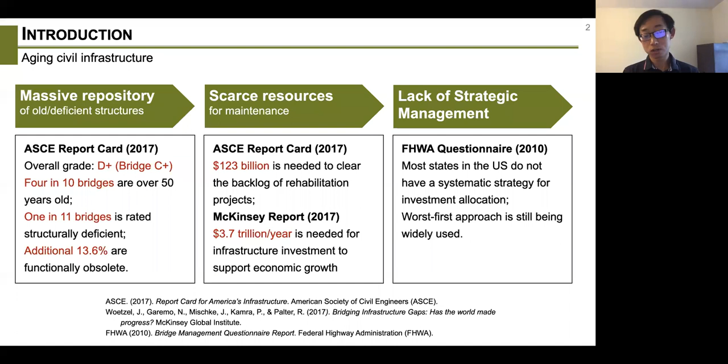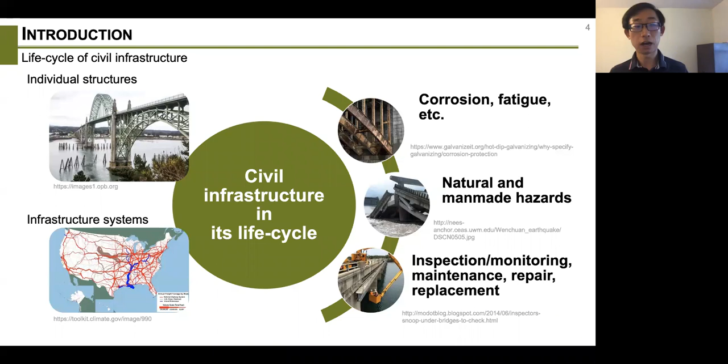So basically, in the service life of the civil infrastructure, the assets may experience gradual performance deterioration due to a number of environmental and mechanical stressors, such as corrosion and fatigue. It may also experience sudden performance drops under natural and human-induced hazards. Because of this, asset managers need to plan inspection and monitoring actions, as well as maintenance and repair actions. All these 3 aspects of infrastructure lifecycle apply to both individual structures as well as large-scale infrastructure systems.

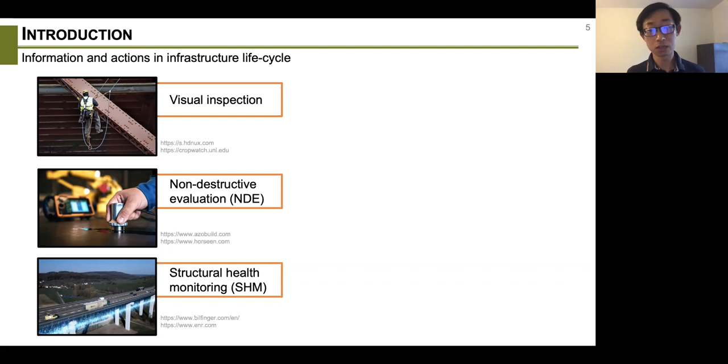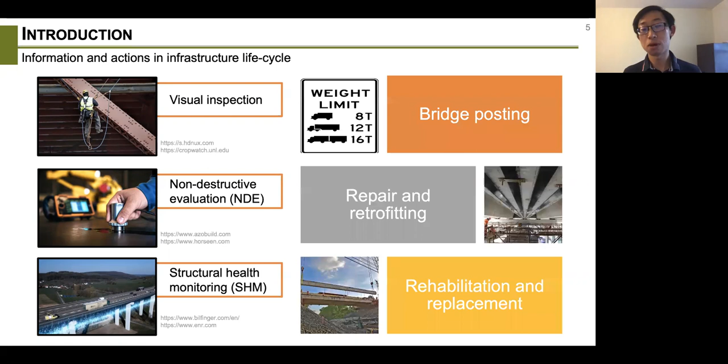In terms of information that can be gathered, for bridges, at least, we have a wide array of actions that can be conducted. This ranges from simple visual inspections based on human bridge inspectors. There are also more advanced technologies based on different types of sensors in the form of non-destructive evaluation, or NDE, or structural health monitoring, or SHM. The latter two have been extensively discussed by Dr. Schumacher previously in this seminar series. Based on the information gathered, the asset managers can decide whether I should post a bridge for weight limits, whether I should repair or even replace a deficient bridge.

So here in this talk, I want to mainly answer three questions. The first one is, how do we quantify the economic value of information gathered from different types of inspection and monitoring actions?

The second question I want to answer is, how do we make decisions based on the value of information? And finally, I want to touch something more general, that is to move from individual structures to interconnected infrastructure systems, and why this is important.

So first, let's look at value of information and its quantification. The quantification of value of information in structural engineering is achieved by using structural reliability analysis and quantitative risk assessment. Structural reliability analysis, for those non-structural engineers, is basically a methodology to quantify the probability of failure given a certain limit state.

And based on the probability of failure, we can combine that with failure consequence to calculate quantitatively the structural failure risk. The benefit of inspection and monitoring information is we can update our prior belief on the structural capacity and structural demand. And in this way, we can update the failure probability of the structure.

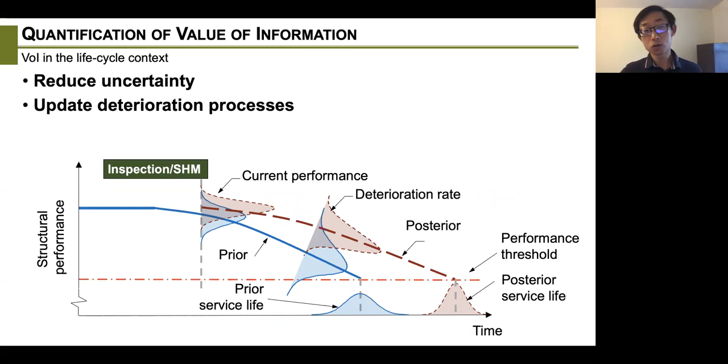In the life cycle context, we can also have a different aspect of understanding value of information. That is, for the inspection and SHM results we gathered from different actions, we can update, of course, the current performance of the structure. But in addition to that, we can also update the entire deterioration process. The benefit of doing that is this information can facilitate decision makers for maintenance decisions.

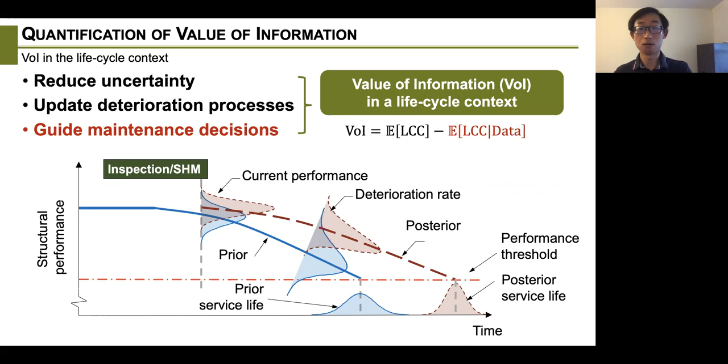And here we can define value of information in the lifecycle context as the difference of total lifecycle cost with or without this information gathered from different types of inspection and monitoring actions. As you can see from the previous slides, a key part of quantifying value of information is to conduct Bayesian updating. And for this task, what we used is called Bayesian networks.

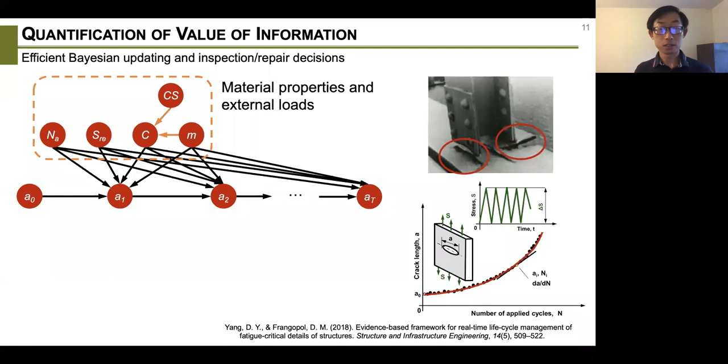So coming back to the applications in structural engineering, the Bayesian network shown on this slide is actually for the modeling of fatigue problems in steel structures. For this type of problem, we have a number of material properties and external loads that will decide the fatigue crack propagation. And based on the fracture mechanics model, we can predict the fatigue crack sizes based on all these primary random variables. Of course, we can use inspection nodes to model different types of inspection results.

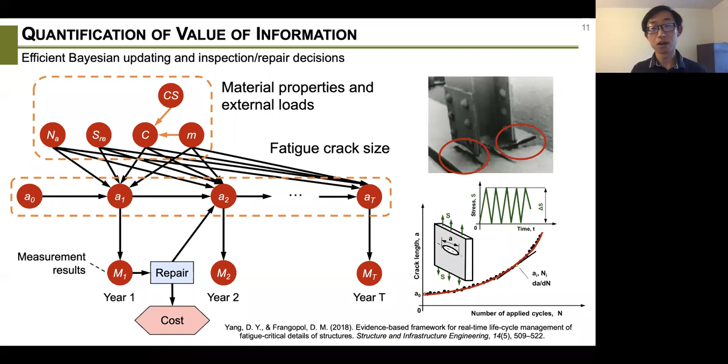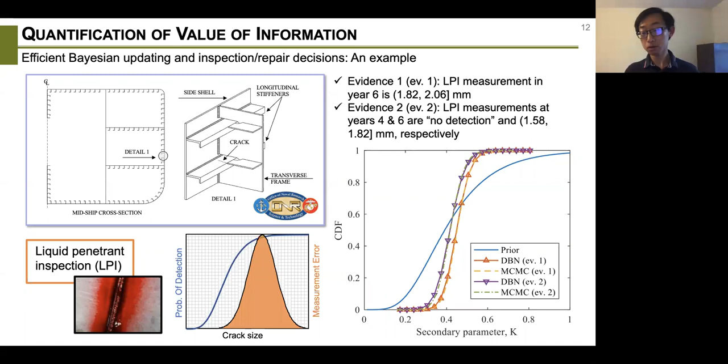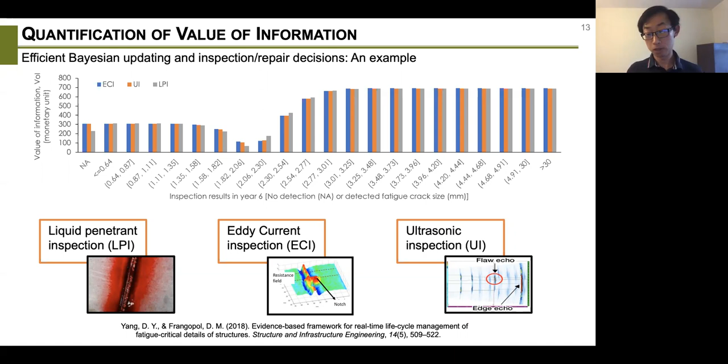The second topic I want to introduce today is optimal decision making. Here I want to introduce two general genres of decision making, that is optimization-based decision making, and more recently what we call decision automation using reinforcement learning. For optimization-based decision-making, basically we have different inspection or monitoring schedules, and we can calculate the value of information or the lifecycle cost given such inspection schedules in the service life. What we want to implement is an optimization algorithm to find the best inspection schedule.

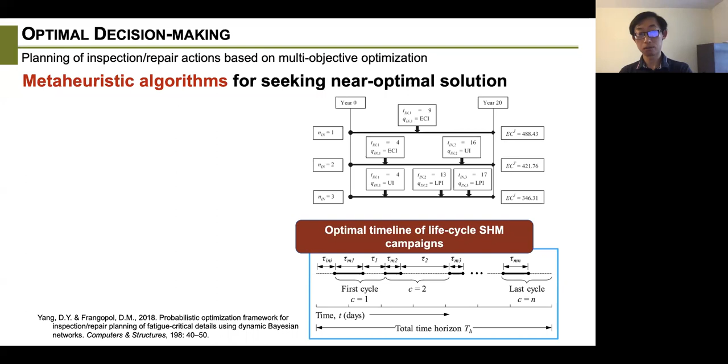This methodology can also be used for structural health monitoring campaigns. For this purpose, we can decide when we need to start our monitoring campaign and for how long we need to have this monitoring system on the structure. Another benefit of using a genetic algorithm or a particle swarm optimization is it is relatively easy to extend from single objective optimization to multi-objective optimization. For example, we can conduct multi-objective optimization to have a set of optimal compromises between conflicting objectives such as value of information and lifecycle maintenance cost.

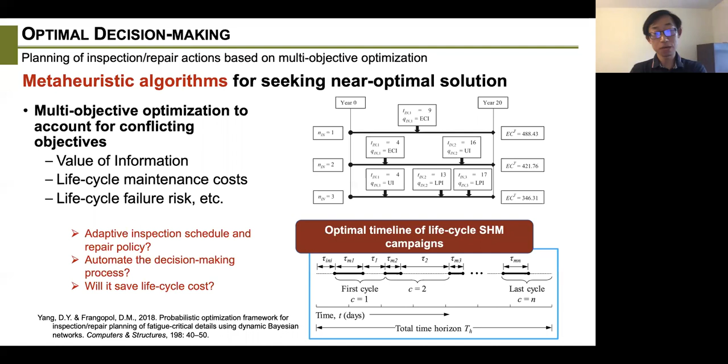However, we didn't stop here in terms of optimal decision making. What we want to push forward is we want to have some kind of adaptive inspection schedule and repair policies. Adaptive here means that instead of specifying when and what techniques I need to do beforehand, I want to have an inspection schedule that can update the coming inspection and repair actions based on the information I gathered previously. And I also want to automate these decision-making tools so that the decision maker can use such tools very easily. And finally, I want to answer this fundamental question, that is, if I can implement this adaptive inspection method, can I save lifecycle cost?

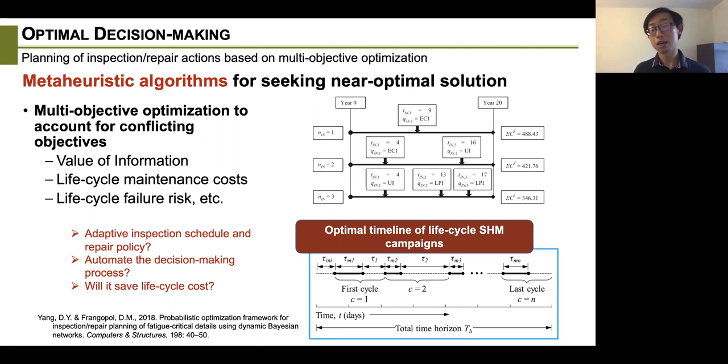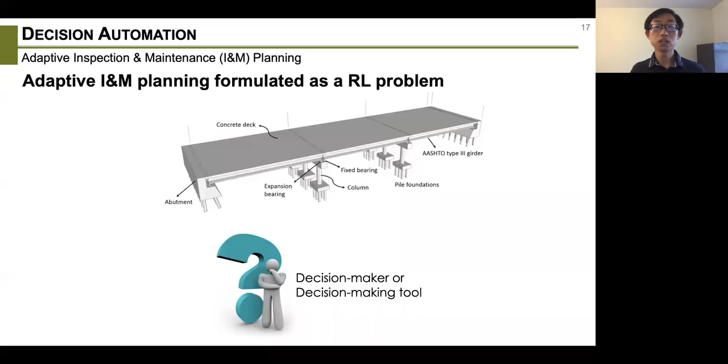To implement adaptive inspection planning, what I used here is to formulate this problem setting as a reinforcement learning problem. This is relatively straightforward because here we have a structure, or more likely we have a numerical representation of the structure, or the so-called digital twin of a structure. And we have a decision maker or decision-making tool. And in each year in service, the decision maker will be able to decide what type of inspection or repair actions the bridge will receive. And the structural model will provide the updated performance given the inspection and repair actions.

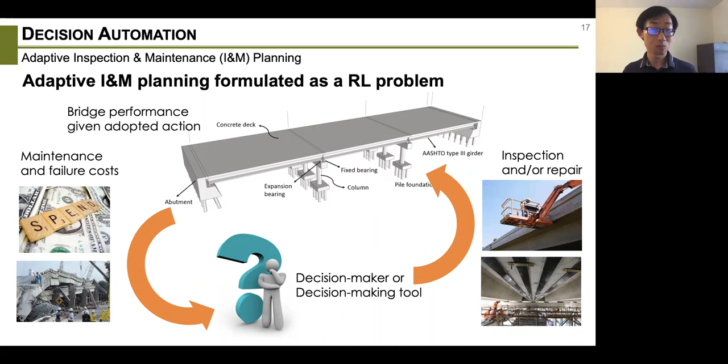Of course, these inspection and repair actions will incur some kind of maintenance cost. And if we don't provide maintenance timely, there will be a tremendous failure cost. So the general idea of reinforcement learning is we want to train a decision-making tool, or so-called decision-making agent, by experiencing this feedback loop over and over again. So in the hope that at the end of the training algorithm, we will be able to have an automatic decision-making tool that can conduct adaptive inspection planning and reduce total lifecycle cost or maximize value of information.

For this purpose, we developed an in-house reinforcement learning algorithm called DCMA2C. This is basically an algorithm combining deep neural networks and actor-critic algorithms in the domain of reinforcement learning. I'm not going into the nuts and bolts here for this algorithm, but what I want to show is this algorithm in action by showing you an application example. Here, what you are looking at is a composite steel girder bridge constructed in 2005 in Pennsylvania. What we did here is, in order to train our decision-making agent, we first translate this physical bridge into a numerical model by using finite element modeling.

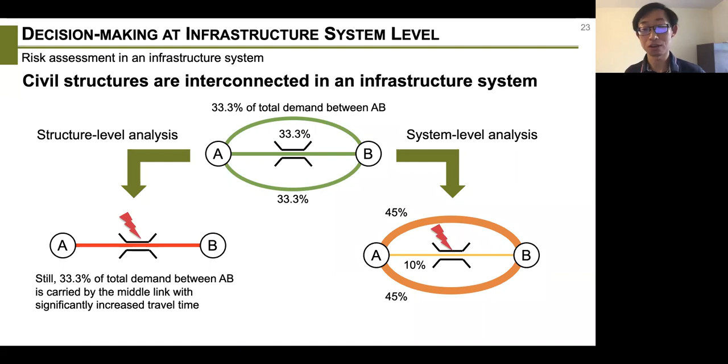To showcase the impact of doing this type of network level risk assessment, we conducted a study to rank the highway bridges in Los Angeles County for maintenance priorities. So here we ranked bridges for maintenance priorities based on 4 different indicators. We have first the safety rating, which is a rating developed by the Federal Highway Administration that only considers structural performance. We have sufficiency rating, which is kind of a semi-risk indicator that tries to combine structural performance with structural importance.

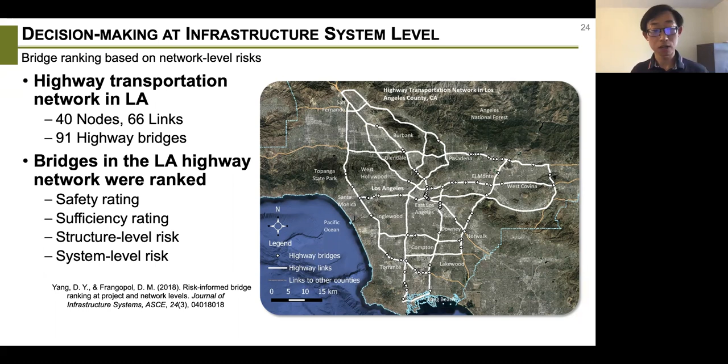And then we also have a bridge ranking based on structural level risk and bridge ranking based on, finally, network level or system level risk. To achieve this network level risk assessment, what we did here is to really take advantage of the data in various public databases. For example, for structural analysis, we used the data in the National Bridge Inventory to first predict structural deterioration, and second, to estimate the failure probability using a structural reliability analysis.

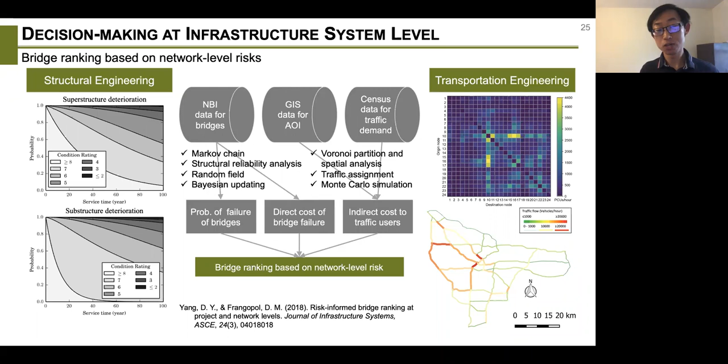And for consequence evaluation, as I said, this is a network level analysis. What we did here is basically to use GIS data for the area of interest and census data to get the traffic demand and network topology so that we can conduct traffic assignments to predict the traffic flow within this transportation network. By using the failure probabilities obtained from structural analysis and failure consequences obtained from traffic assignment, we can calculate the network level bridge failure risk and rank the bridges based on this network level risk.

You can see a lot of bridges that, even though in a worse condition, are very rarely used. On the other hand, the bridge ranking based on the network level risk can capture those structures with really high importance, whose failure will really impact the network level traffic performance.

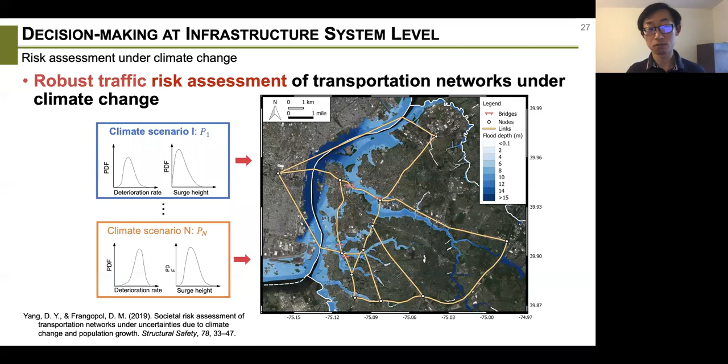The slide here shows a previous study we did for Camden County, New Jersey. Here we are looking at the bridge failure risk under climate change. And again, we are using a network level approach to really analyze the network level risk under the stressor from climate change, considering different climate change scenarios.

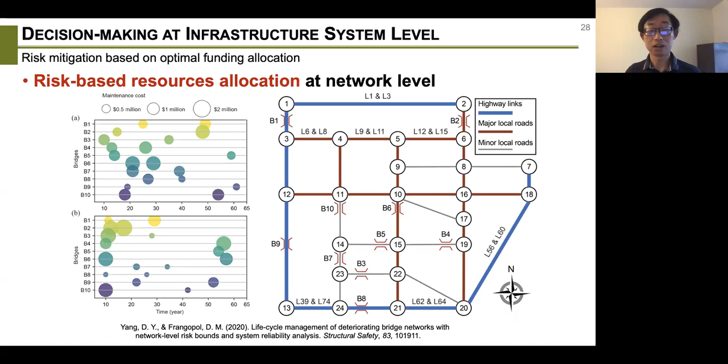And finally, I want to mention that because of this interconnectivity of different infrastructure assets, the resource allocation really has to be conducted at the network level as well. I think this is a major difference between resource allocation for infrastructure systems and traditional portfolio management, because here the assets are no longer independent of each other. For this purpose, we developed a risk-based method combining risk analysis at the transportation network level and the genetic algorithm in order to have an optimal resource allocation plan for different bridges in a network.

The last part of my presentation mainly deals with the interaction between decisions and civil infrastructure systems and why the decisions should be conducted at the network level. And my future research is dedicated to really closing this loop by looking at value of information-based decision-making not at the structural level, but at the infrastructure system level.

In terms of the areas of expertise I'm looking for collaboration, first, I'm very interested in researchers doing works on Internet of Things, as well as novel data collection methodologies. Specifically, I'd love to collaborate with people doing novel NDE and SHM methods, as well as crowdsourcing data and data fusion. Another aspect that I'm interested in is the GIS-based spatial and network analysis with an emphasis on the transportation network and interdependent infrastructure systems.

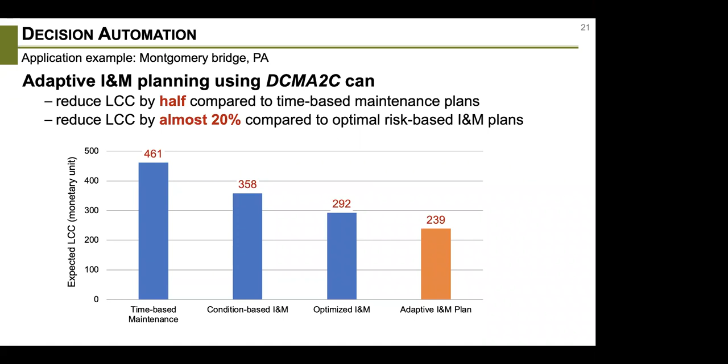The first one, Ali is asking, did you apply your model to determine the remaining service life of the bridges? For bridges, you have a design service life of 75 years. So for that purpose, we analyzed this deterministic service life. For fatigue problems, we did predict the remaining service life based on the updated fatigue crack growth model using Bayesian networks.

Okay, another question: they're asking about how much the sensors, for example IoT, and the maintenance decision can be built into the new bridges' design and construction. Can you say that again, please? So he's asking how much the sensors, for example using IoT, and the maintenance decision can be built into the new bridges' design and construction.

So I think we really need a shift of design methodologies to take into account the life cycle performance. For example, we can adopt a performance-based design approach similar to seismic design. If we conducted such life cycle analysis, it would allow the asset owners maybe to take a lower insurance premium. With that incentive, maybe people will adopt this type of life cycle informed design more widely.

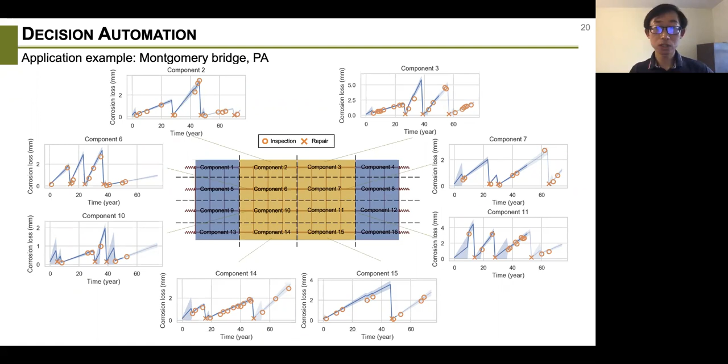I have another question. Does this decision automation process only apply to modern bridges? If so, how modern must they be and what specific features must they have? It doesn't have to be a modern bridge. If you look at this bridge model, this is a really conventional bridge design. The key information I need to conduct decision automation is structural drawings, so that I can create a digital twin or a numerical model of the structure. Without a bridge drawing, it's relatively hard to create this kind of structural model.

So I think the structural model is the key. As long as I can build a structural model for a bridge, it doesn't really matter how old the bridge is. Of course, for older bridges, I may also need some condition results so that I can account for the difference between the design condition, the pristine condition, and the current condition of the bridge.

But once I have the material properties and the geometric properties of the structure, I will be able to conduct such a decision automation process. So including historical covered bridges? Yes. Historical structures? Yeah, I mean, really ancient structures without any drawings, that will be hard to create a model. You could do that, but it will itself involve a lot of uncertainties. Then it will raise the question of how accurate your decisions are.

So I have a question. David, in your experience, how open are departments of transportation to having those dynamic inspection schedules? Do they have guidelines or even regulations that preclude them from doing this? Are they open to this? It seems like a very new way of doing work.